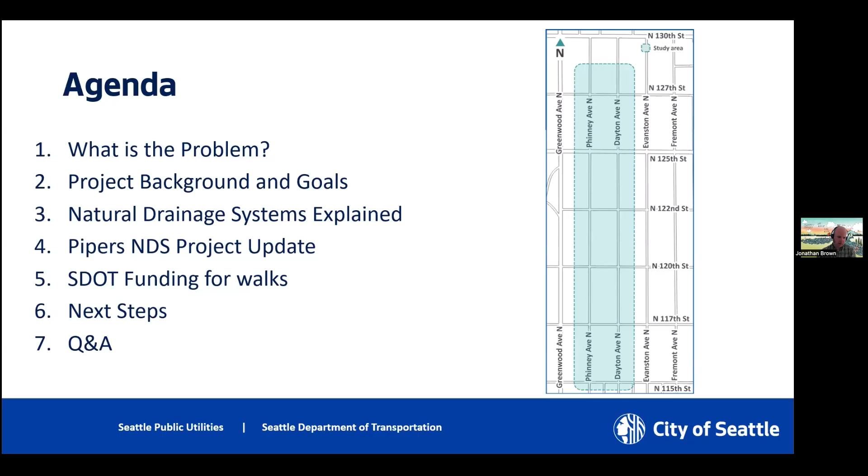For tonight's agenda, we're going to cover the following items. The first three are very similar to what we presented back in November, the last time we had the opportunity to do one of these public webinars. Those will be pretty similar to what you've seen before, but we feel it's important to go back through to remind ourselves why we're doing the project and what problems we're trying to solve. From there, we'll give you an update on the project since the last time we presented, what our next steps are, and at the end we'll have time to answer questions.

So first off, we'll start with the project background and goals. Again, this will be similar to what we presented before, so I'll move through these slides relatively quickly, but our November presentation is still posted on our website if you're interested in going back and looking a little closer at that.

Starting at a high level, as we all know, it rains a lot in this city. We have beautiful lakes, creeks, waterways, and the Puget Sound. In a lot of our urban areas, water falls on the roadway pavement, collects pollution, and then drains directly to those creek systems. Right now we have more than 370 billion gallons of polluted water from urban areas carried into our water bodies by stormwater runoff every year.

So how are we addressing this problem? The City of Seattle has signed an agreement with the federal government called a consent decree with the Department of Ecology to clean up our stormwater, called the Plan to Protect Seattle's Waterways. As part of our regulatory compliance efforts for meeting this consent decree, Seattle Public Utilities has developed an integrated plan, a comprehensive program and schedule for implementing projects and other measures to improve water quality in our waterways.

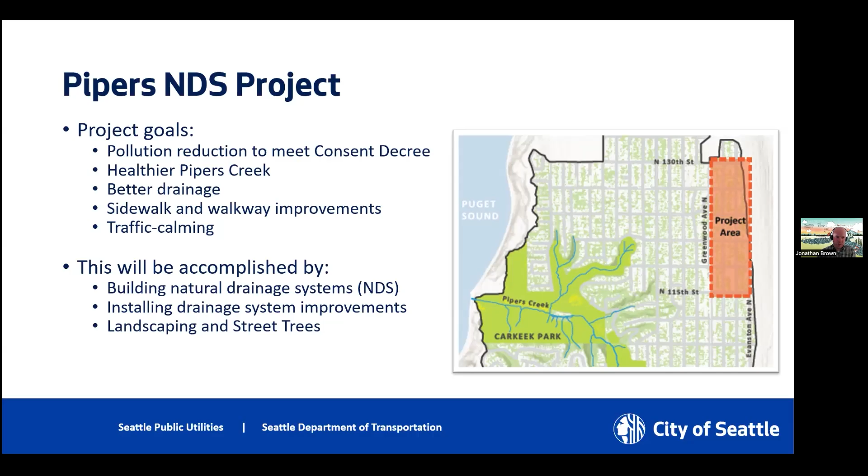We want to improve sidewalks and walkways and provide traffic calming where feasible. We'll accomplish this by building natural drainage systems, installing additional drainage improvements, installing landscaping and street trees, and installing pedestrian improvements.

Now focusing a bit more on the natural drainage systems themselves and how they work. At the highest level, natural drainage systems are human-made structures meant to emulate nature. We want to build these depressions in the ground along the edge of the street with plants and special soils where water can drain into, get slowed down, and have contaminants removed before it's discharged back into the creek and other waterways.

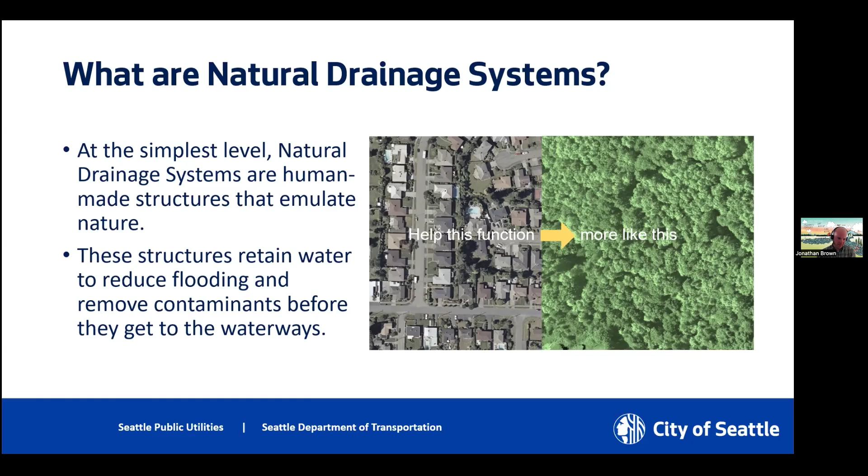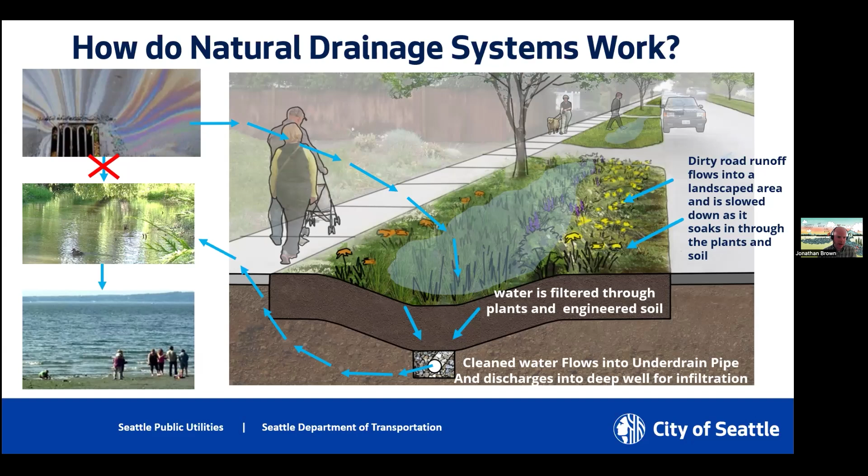A bit more zoomed in view of how these systems actually work. As you can see from the graphic, dirty roadway runoff gets collected into these natural drainage system depressions, where the water is slowed down and filtered through the plant material and then through an engineered soil mix before it's collected in an underdrain pipe and conveyed to a deep well for infiltration. We'll show that more on the next slide.

This graphic shows the natural drainage systems collecting the runoff into the underdrain system, then going to a maintenance structure that will have a pipe that injects that water deep below the ground, approximately 50 to 100 feet below the existing ground, so well below any basements or foundations.

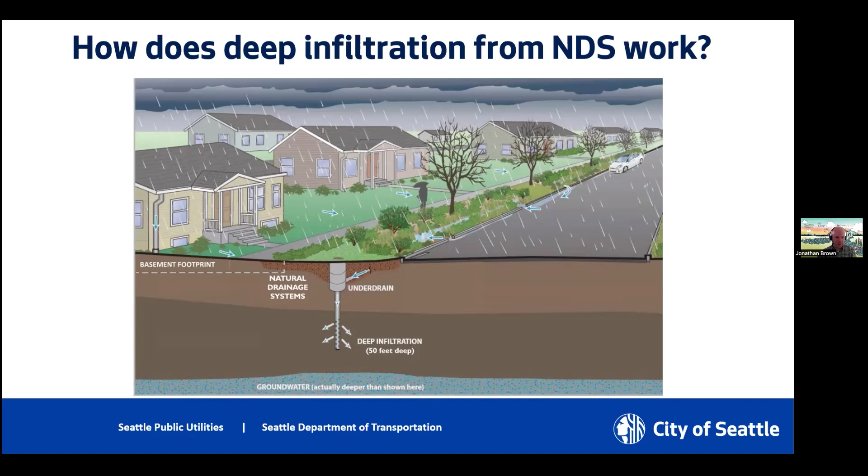We also wanted to share what these natural drainage systems can look like across different seasons. The left image is from a natural drainage system constructed in the Ballard neighborhood, shown in the spring. In the middle is the Venema project east of Greenwood, also in the spring. And we have a picture of a High Point project in West Seattle from the fall and winter.

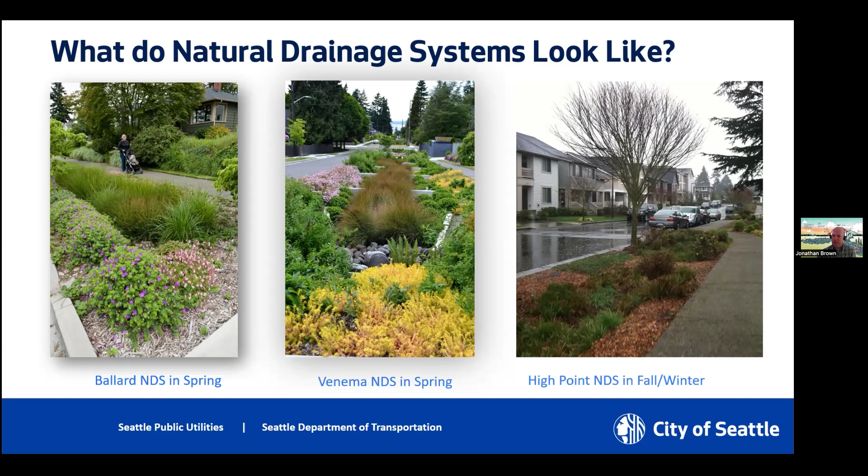It's also important to share that these are living systems that will grow and mature over time. The image to the left shows the typical planter strip where we will construct these natural drainage system cells. Moving left to right, you'll see the newly planted cell, then approximately one year after installation as they continue to grow in, and finally after about five years when everything is fully matured.

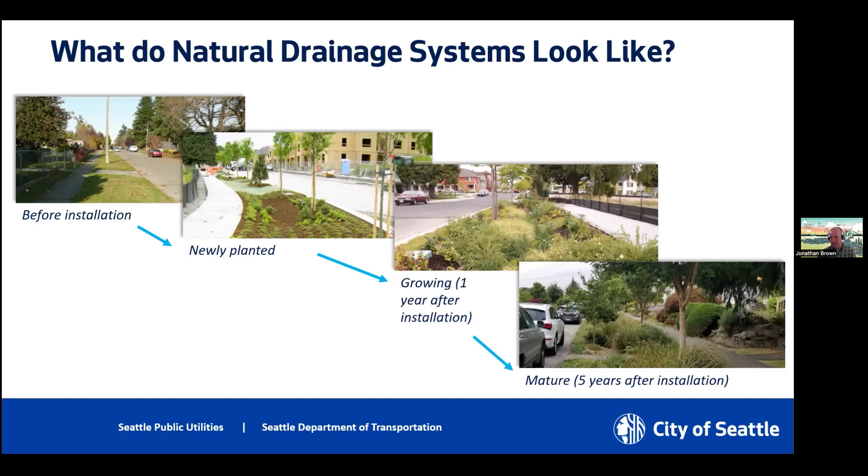And now I'm going to hand it over to Nathan Polanski from MIG to talk a bit more about the project-specific updates that we have to share. Thanks, Jonathan.

Okay, you want to jump to the next slide. What we'd like to do is give a little bit of an update on what we've been doing since we last talked to you in November, and share more information on the refined study area and focus moving forward.

When we met last time, we talked about the work we had done to date. As a reminder, the city has performed a topographic survey, identifying all of the elements in the public right of way—where the street edges are, where the signs are, the sidewalks that exist, and all that infrastructure.

Over the last few years, the city has conducted soil testing. They've installed monitoring wells in the neighborhood, then done infiltration testing on those to identify how deep and where within that soil profile infiltration is possible. You may have seen, about a week and a half ago, a drill rig on 115th between Phinney and Dayton installing one more monitoring well.

Our team has been out observing the site during rain events and non-rain events, collecting data and getting a better understanding of how the streets and stormwater flows from a functional standpoint. You may have encountered some of our team members conducting door-to-door outreach last spring, and then the virtual meeting in November.

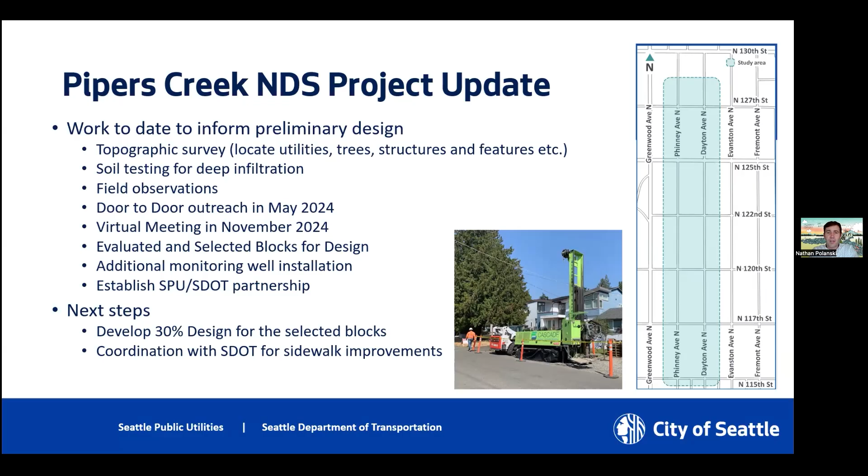For those who attended in November, we talked through how we're identifying sites for natural drainage systems, based on technical feasibility. First, we need to find space available in the city's public right-of-way, which depends on the type of street. Much of the neighborhood has yield streets, but Dayton south of 125th is an arterial street, with different requirements for how it builds out over time. We're looking at space available today and in the future as street improvements are implemented. We're also looking at where drainage runoff collects, particularly at the downstream end of blocks.

Below ground, things you may not be aware of, we need to understand where the utilities are. The city has requirements for separation between water mains and natural drainage systems. So we're looking at where the sewer serving your house is, where water services are, gas mains—both the mains and the services to individual houses—and then coordinating with SDOT on their goals. Those are some of the key factors.

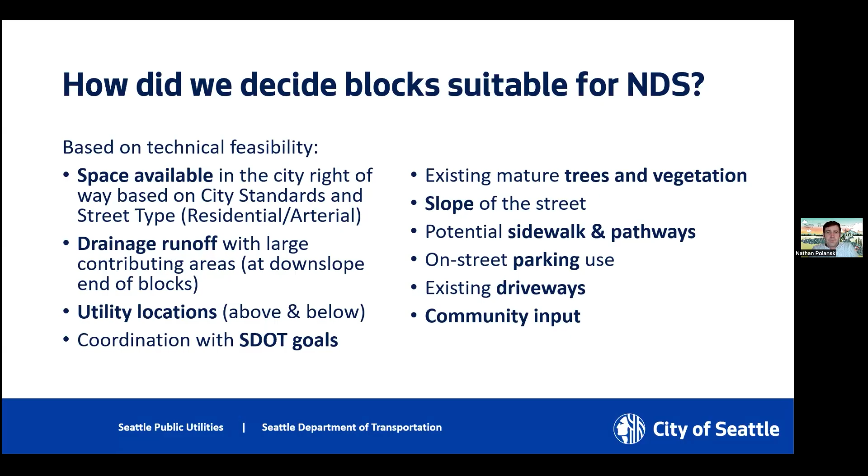Next slide. I'm sure you're very familiar with the streets in your neighborhood. These are a few examples of the different blocks we've been studying over the last year—a variety of conditions with ditches and culverts in some places, gravel shoulders, and in some places not a lot of drainage infrastructure, leading to more ponding. Jonathan talked about the localized flooding or ponding that happens in areas. So there's a lot of different conditions, and we're taking that into account as we identify feasible sites and the preferred solutions we'll talk about tonight.

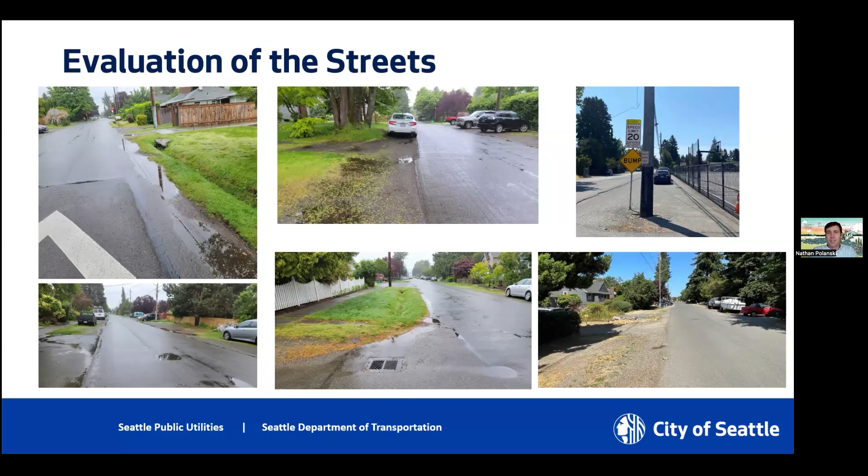We're looking at two different types of natural drainage system cells for this project. One, the preferred approach to some extent, is the standard graded cell. Those two images on the left show a soft graded slope from the roadway down to a depressed area where water can collect, sloping back up to what would be a future or new sidewalk. Below that, you can see how that graded side slope looks in a built condition.

We're also looking at a cross section that could have a wall on one side along the sidewalk. The center image shows a low wall with a screen providing a vertical drop between the sidewalk and the planted area. This would be designed with a special system supporting the pavement above. In the top right graphic, you can see soil cells that can be used so the drainage system expands under the sidewalk, giving a bigger footprint and allowing fewer cells along the block. The city has done this in a few locations on past projects, so we're looking at both approaches and trying to figure out what's most appropriate for the neighborhood context, and what meets SPU's goals for water quality benefit.

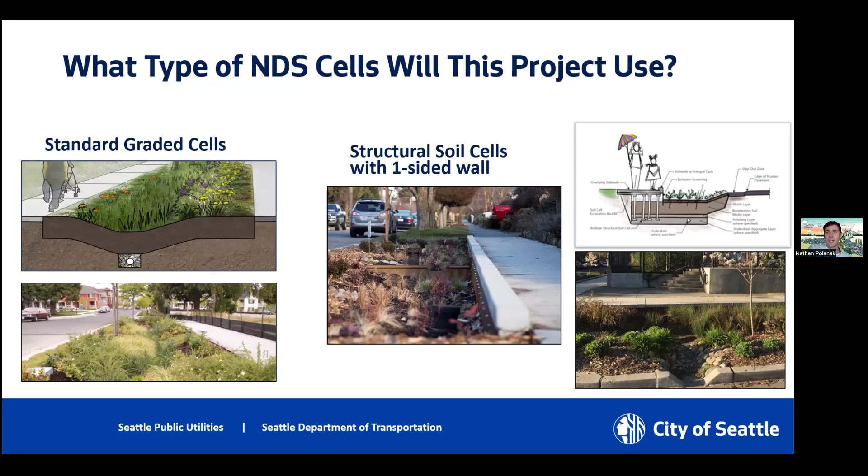Jonathan mentioned the deep infiltration wells and showed that graphic on the right. Since we last met, we've been working with our technical team, geotechnical engineers, to map the borings that have been done. The monitoring wells that were installed—geotechnical engineers took soil samples during that boring process, and we're able to map that soil below ground. The top layer, extending about 30 to 50 feet below ground level, is very dense glacial till material that doesn't allow water infiltration. But below that, in the green layer in the middle, there's a more receptive layer of sand and gravel that can take infiltration. The zone between that dense, non-infiltrating red layer and the regional groundwater in blue at the bottom is our sweet spot to provide infiltration.

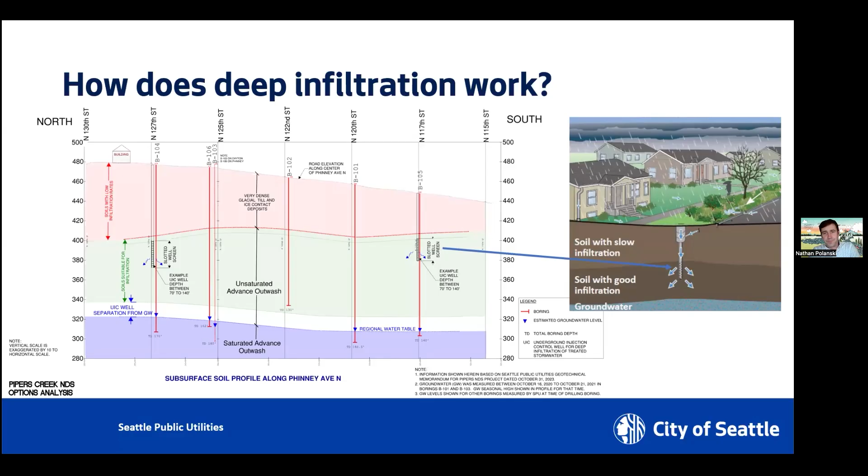So the types of changes that we're looking to make to the streets in your neighborhood, these are simple cross sections that show how the street functions. The top one shows how the streets and the right-of-way work today. People are able to drive in two directions on your neighborhood streets, and most people tend to park on the shoulder, the gravel shoulder, but within the public right-of-way.

So we're looking and working with Seattle Public Utilities and SDOT to formalize that road width and widen it to 25 feet so people can park on the street and have one lane of two-way travel, similar to other neighborhoods south of the 80th or 85th neighborhood.

We're looking at, like I said, two different types of natural drainage system cells. The middle section here shows the graded side slopes with cars parked on both sides of the street and one travel lane in the middle.

And the bottom section shows how we might narrow the street to provide a curb extension. If you look at the picture in the bottom left, you can see a small curb extension that bumps out into the roadway, removes one or two parking stalls, and allows more space for the natural drainage systems.

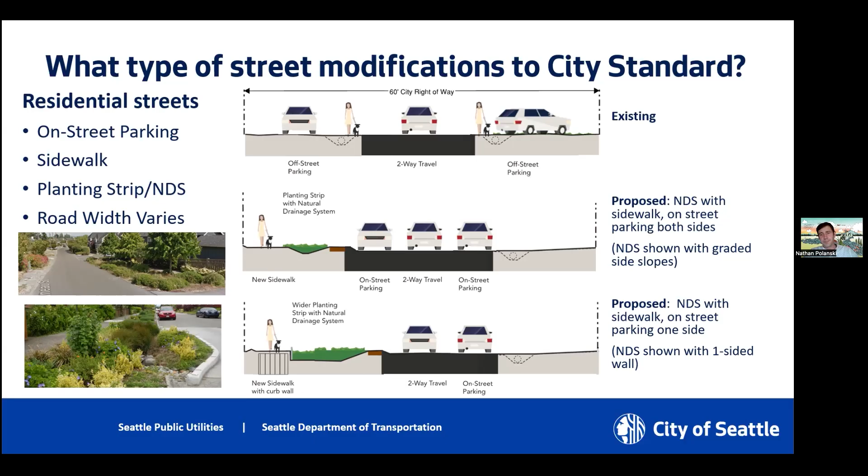So these maps - when we met last time, we shared the map on the top, which showed the study area and the streets being considered with the preliminary options. After going through the evaluation, we've made some changes to the streets based on anticipated impacts to the neighborhood, and also from some of the other feasibility work in order to meet SPU's project goals.

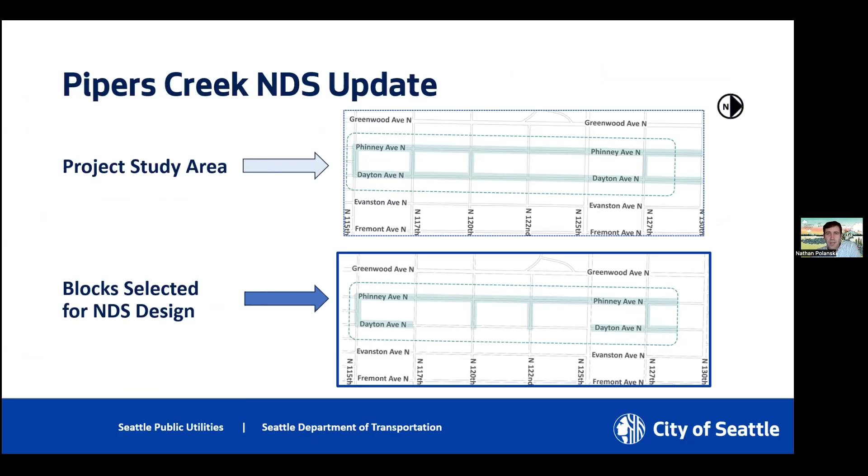So we'll talk first about the blocks that were removed. On Dayton Avenue, between 125th and 117th, those blocks were removed from our study area. Changes to Dayton would have resulted in removal of on-street parking.

And so understanding and recognizing the impact on the neighborhood there, after going through the evaluation with SPU, we determined that improvements on those blocks were not of the most benefit.

We also removed 117th between Phinney and Greenwood, because of the impacts to the school and the church, both in terms of parking use and operations, and some of the other technical challenges based on the infrastructure and the grades that are there. Those four blocks have been removed from our study area.

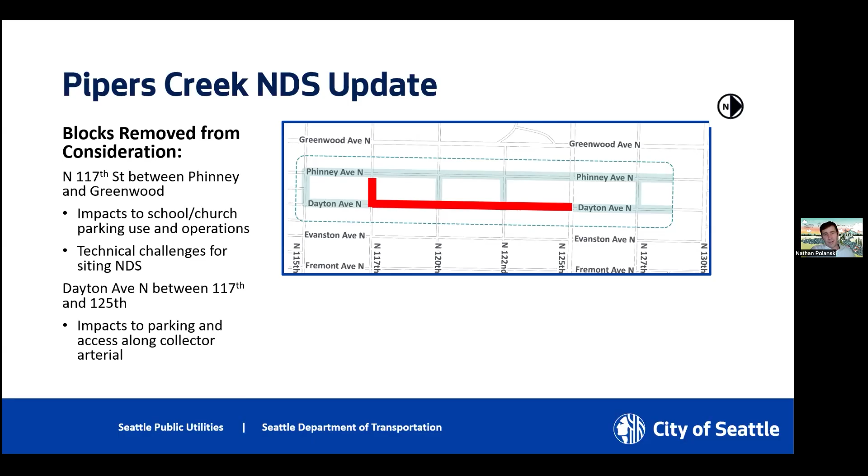As we removed those four blocks, SPU still needed to meet their goals for providing water quality treatment. So we had to take a look at other opportunities where there may have been potential to provide that water quality treatment on blocks we hadn't been looking at previously.

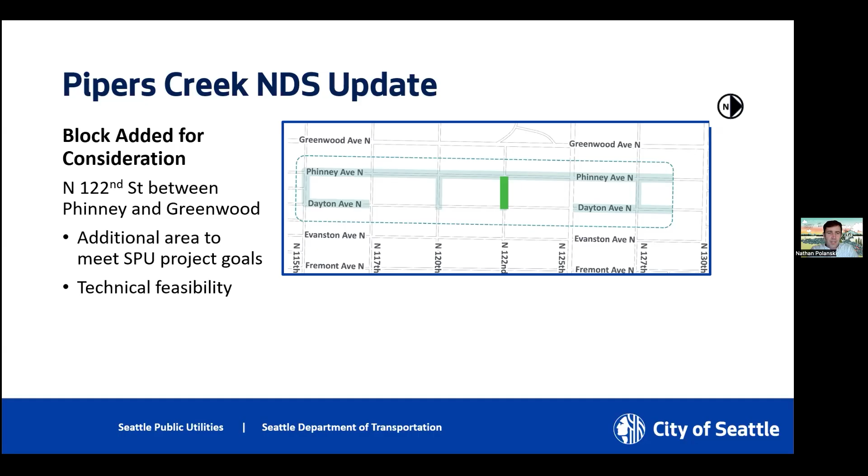And so one additional block on 122nd between Phinney and Greenwood has been added back into the study area as an opportunity to help meet SPU's goals based on the technical feasibility of that street.

So I mentioned, as we've narrowed down to specific blocks, going back to how do we decide where to put natural drainage system cells along a block. I talked earlier about the different feasibility elements that go into that.

And the key criteria are really: we want to put natural drainage systems where we're collecting stormwater, where there's space available for them and we're not impacting driveways and trees, and also where we're not impacting existing public infrastructure.

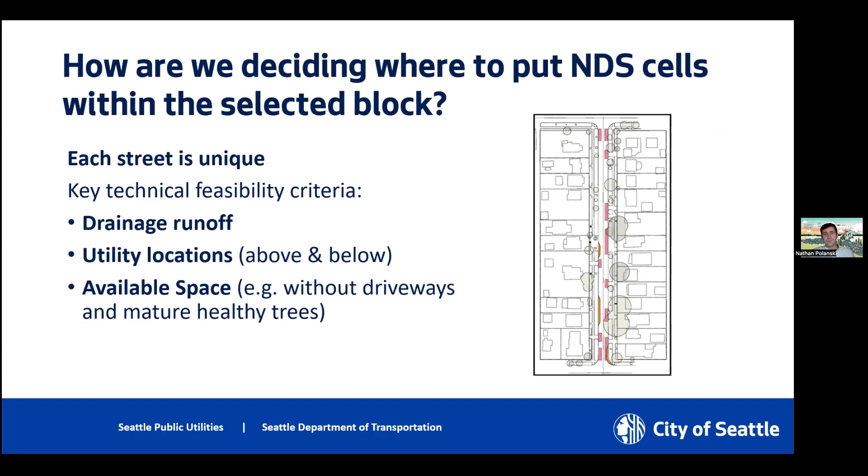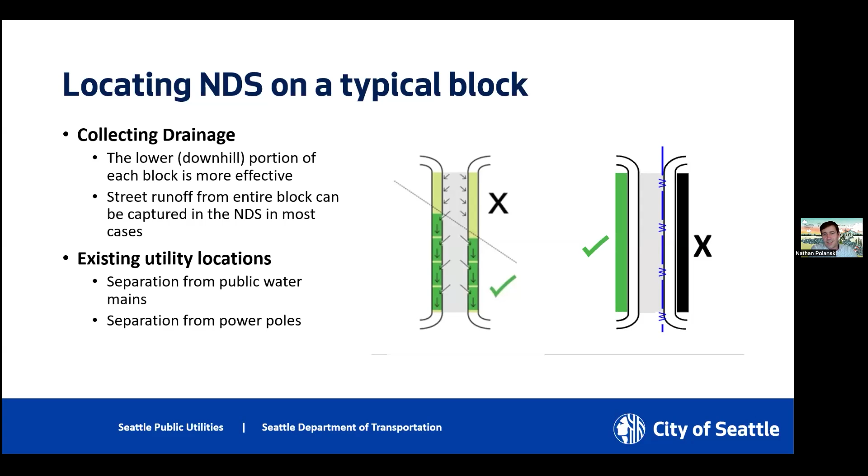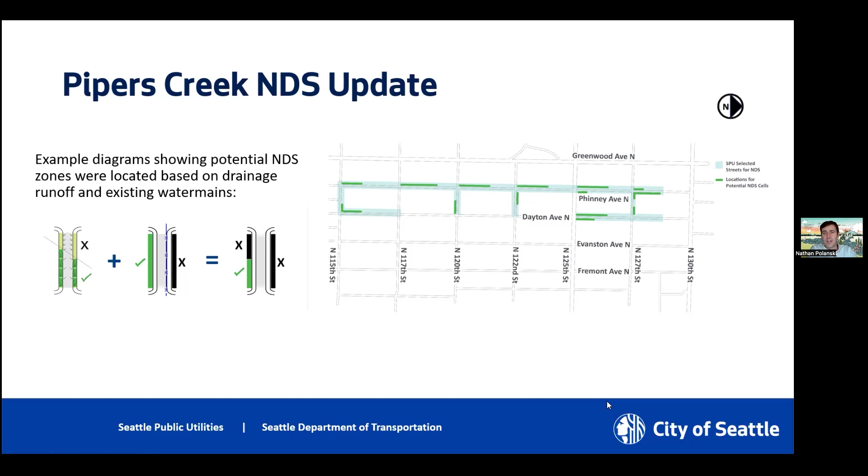Over the last month, one of the things we've been doing is looking closely at how we can partner with SDOT. SDOT is really interested in providing continuous connections through the neighborhood with the transportation levy that passed in November. There's funding to provide sidewalk improvements throughout the city, and this became a great opportunity for city departments to work together to provide a more beneficial project to the neighborhood, focused on the areas SDOT is targeting for neighborhood and community connections within our study area.

Thank you, Nathan. I'm Brian Dougherty with the Seattle Department of Transportation, in the Project Development Division, where I oversee our new sidewalks program. Thanks to Seattle voters who approved the Seattle Transportation Levy last November, we have more money for new sidewalks than ever before. As Nathan mentioned, we'd like to partner with SPU to maximize the positive impacts this project will provide to your neighborhood, by filling in the gaps between those green lines and providing a connected sidewalk network as part of this project, and extending the limits to connect to the existing sidewalk network.

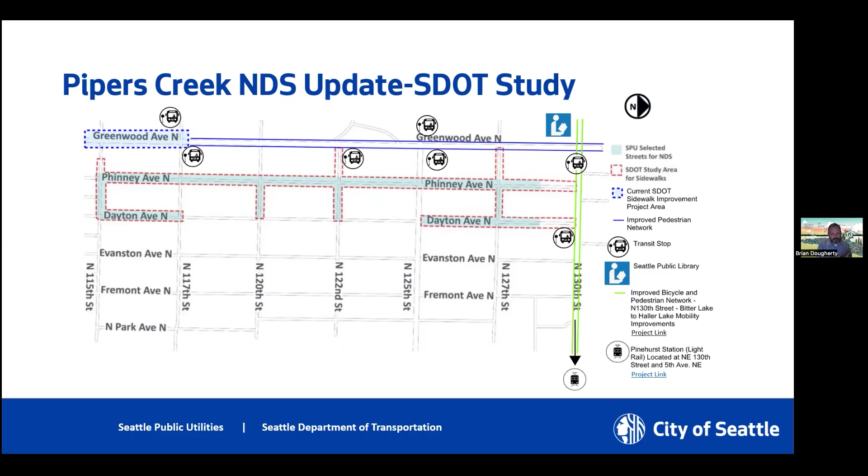For the last 20 years or so, we've been installing new sidewalks on Greenwood Avenue, and we're very close to completing those. We're at 60% design for the final phase of that work, and the sidewalk network on Greenwood will be completed in roughly the same time period as this project. So we want to connect these new sidewalks on Phinney and Dayton to the Greenwood sidewalks, to provide a connected pedestrian network for accessing things like transit on Greenwood, the library, and coordinating with the North 130th Street mobility improvements that are in design, connecting people to places like Christ the King School, the Broadview-Thomson K-8 School, and the new Pinehurst Light Rail Station.

This project is building strong community connections for the Bitter Lake community to local services, like the library, Christ the King School, and the Pinehurst Light Rail Station. Funding for the project will be provided by the 2024 Transportation Levy. Funding for design was actually provided by the previous levy, which got us to 60% design for Greenwood. There's some funding from other sources, but for this project, it'll be all from the Transportation Levy.

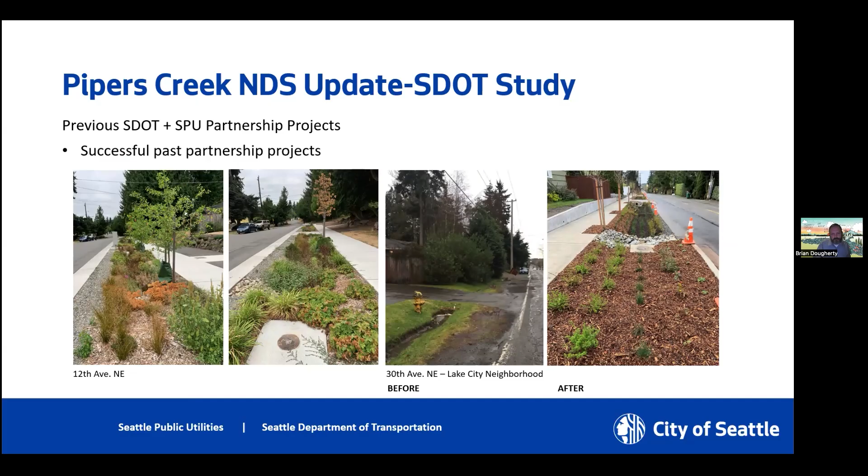SDOT and SPU have a long history of working together on successful projects like this. On the left, 12th Avenue Northeast in Pinehurst was completed about 5 years ago, and on the right is 30th Avenue Northeast in Lake City. Both were partnership projects where SPU installed natural drainage systems and SDOT installed sidewalks. We also know there's a history of requests for traffic calming on these streets. We had a home zone project a few years ago where we heard a lot of interest in speed humps. The walkways and natural drainage systems will narrow the roadway widths, providing a traffic calming effect and slowing down traffic. But we're also willing to look at additional traffic calming we could do as part of this project or shortly after it's completed. To support that evaluation, we're going to do some additional traffic counts on these streets and on the streets to the east.

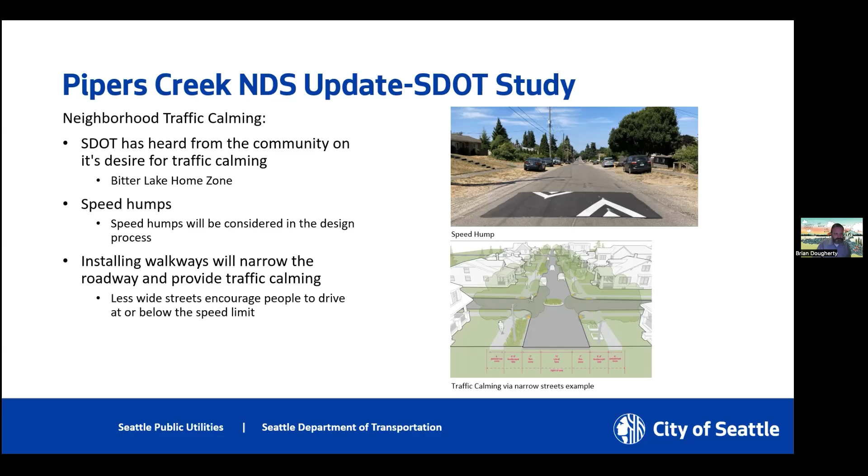I will go through our project team's next steps. First, we wanted to share our project timeline. We've completed our options analysis phase and selected the blocks for NDS designs, so we will start working on the engineering design for the NDS and the sidewalks. We'll continue our community engagement and coordinate with SDOT on the design of sidewalk and walkway improvements beyond the NDS cells.

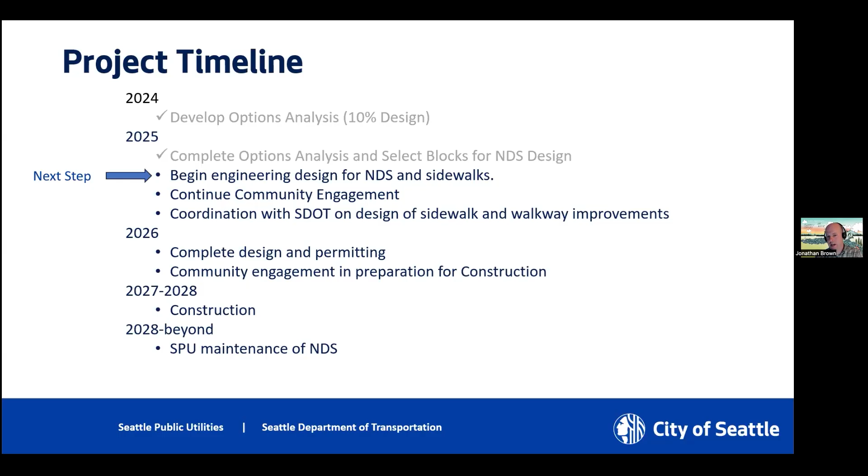In 2026, we'll continue and hopefully complete our design and permitting processes. We'll also continue community engagement with a focus on preparing neighbors for construction. Construction is planned for late 2027 through the end of 2028, and beyond that, SPU will be maintaining the natural drainage system cells.